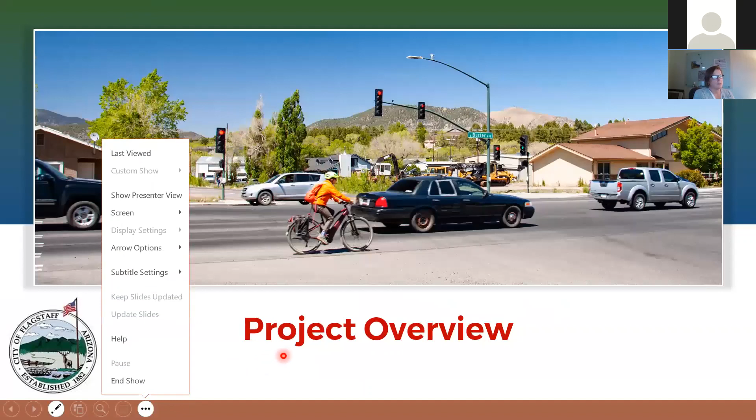In February of this year, council awarded a design build contract to a team that includes Ames, our contractor, and WSP, the design consultant. Since February, the team's been working on development of the approved concept, data collection for the traffic analysis, and coordinating work with BNSF Railway, the Army Corps, and ADOT.

We've also been working on property acquisitions and relocations. With early direction from council, we've also strongly focused on enhancing and building upon the concept for bike-pedestrian safety through separated facilities.

In addition to the overpass, the Lone Tree Corridor will also be enhanced down to Sawmill Road, and this is to provide a corridor with consistent improvements. The corridor funding was passed as part of Proposition 419, and that was in 2018 also.

So tonight we'll go over what we've developed to date for the project scope, the intersection designs of Lone Tree and Butler and Lone Tree and Route 66, and the project aesthetics.

Our next steps after tonight will be to take your input on the early design, and we'll also be presenting to council on October 19th, which is open to the public. We'll take that input and evaluate on how best to integrate your ideas into the project as we proceed with design. So this is the first of many meetings, and we'll be coming back as we make progress and to get further input.

One thing that you will not see yet in the presentation tonight is the economic impact analysis study. That report is in review in draft form with city staff and will be placed on our project site and presented at a future public meeting.

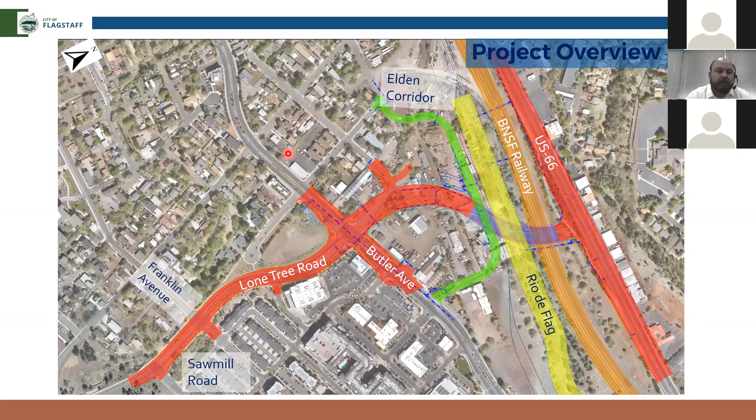So now we're going to go into a little more detail, segment by segment, to give a more detailed breakdown. This is the south segment, again north to south - south side is on your left, north is on your right. Our project limits begin at Sawmill Road and extend north along the existing Lone Tree Road up to Butler Avenue. There will be some intersection improvements, which we'll discuss later in this presentation.

What we are doing is widening. It's currently a 2-lane roadway, one lane in each direction. We'll be widening it to a 2-lane roadway in each direction, mainly with inside widening, meaning we'll reduce the median width to create an extra lane in each direction. We'll also have some outside improvements for the FUTS Trail at the top of the page, the west side of the roadway, and improvements for the existing sidewalk plus addition of a northbound bicycle lane on the east side of the project.

So on the bottom of the screen is a typical section. This is if you were standing looking south, so the east side, the bottom of your screen, is on your left; the west side, the top of your screen, is on your right. Walking through this: you have a 6-foot sidewalk, a 6-foot northbound bicycle lane - this moves the bicycle lane off the street into a buffered bicycle lane off the side of the roadway - 2 northbound lanes, and a maximum 15-foot median island.

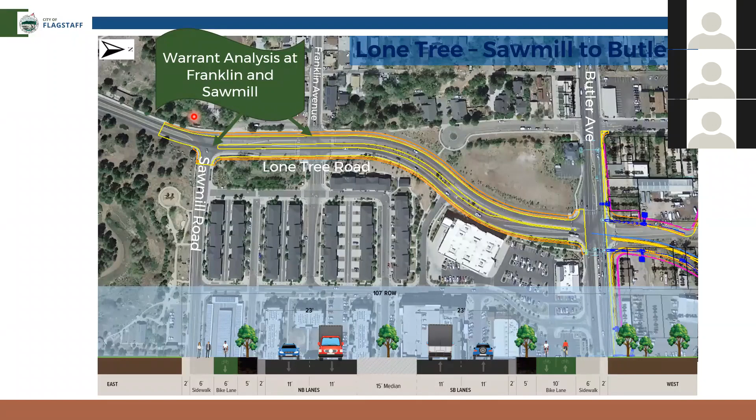Jason, do we want to hop back to that overview? Yeah, if we can go back.

Brannen will still have a connection to Lone Tree itself. You can see Brannen right here is connected. It will be cut off from northbound Lone Tree. There's a median that will come down, which we'll show in the next segment. But there will be a maintained connection to southbound Lone Tree. So the one direction that would be cut off is if you are going northbound Lone Tree, you would not have access to westbound Brannen. You would have to use alternate access going westbound on Butler, then coming up Elden, and then back through to Brannen. But there will be a right-in, right-out maintained at Brannen off Lone Tree, and the driveway accesses will be maintained.

Does that capture the area where your office is, for the citizen? Christine, I don't think it does. I believe that individual's office, and she'll correct me if I'm wrong, is out in the area where the green line connects towards Butler. So you'll have three ways to get into the neighborhood: one is on Lumber, one is on Gable, which will probably remain unimproved for the moment, and one will be on the Elden Corridor. It's hard to say specifically where you are and what access would be best for you, but we will not be cutting off access to any parcel.

This is the close-up of the next section, zooming in on the connections Christine was just talking about. To orient everybody, this is the new stretch of roadway we're building, extending Lone Tree Road to the north. Your north arrow is here on the top left. We're going to tie into US 66 on the north. This is a grade-separated roadway, so you can see the bridge structure begins right about where Elden Corridor is, and we'll elevate the roadway over the RDF and BNSF railways, tying into US 66 at grade.

We begin to climb grade-wise from Butler Avenue, where we tie into Brannen on the west, about 5 or 6 feet elevated at that point. By the time we hit Elden Corridor, we're at about a 20-foot elevation. Over the BNSF railway, we're about 24 to 25 feet elevated, to maintain required vertical clearances per BNSF standards. US 66 is at an elevated topography compared to Butler, and we're actually tying in at existing grade. We're also accommodating the existing FUTS trail system at US 66, with a split path: one at grade just south of the US 66 corridor, and another going underneath the bridge to provide a grade-separated pathway for pedestrians.

Elden Corridor coming off will provide some access to the east side parcels. We are also maintaining the Gable connection, as Christine mentioned before. So all these parcels are still accessible based on current existing driveways, and the west side parcels are still accessible off of Elden and off of Brannen as a right-in, right-out. The only change in access will be northbound to westbound coming off of Brannen.

I think there was a question coming up. Yes, we've had 2 questions. What will be the speed limit on the new roads? This relates to safety and noise.

That is a good question. I don't have that right now. I believe we had a 30-mile-per-hour design speed. Christine, do you remember offhand? Frank probably wasn't able to join us right away. I believe north of Butler on Lone Tree, the new extension overpass will be posted 30. South of Butler, I believe it will be posted 35. Jeff Bauman's on the call—I think that's right, but please correct me.

Yeah, I believe that was what I had in my memory too. Unfortunately, Frank couldn't join us right away due to another commitment. So, 30 north, 35 south, we believe, but we can confirm. Jeff in the comments does believe they're the same speed limits, so yes.

One other question: will there be a signal at the intersection of the Elden Corridor and Butler? Currently, the Elden Corridor and Butler are not planned to be signalized intersections, due to the proximity of the connections to Butler and Lone Tree. Typically, you don't want signalized intersections in such close proximity to each other. So right now, the plan is to have them as stop-controlled intersections. But the Elden Corridor in general is still being evaluated—we're still early in that evaluation process.

Annie Taylor, trying to go back and find your comments. Southwest of Lone Tree, before East Brandon. Go out at Gable. So I'm not familiar with exactly where that southwest of Lone Tree is. I think Annie's talking, Jason, about back where you've got the image with the green line. She wants to know if Gable has the median in front of it and she has to make a right turn. Will she have to make a right turn onto Butler and then U-turn somewhere? Or is she going to have the ability to make a left out of that area?

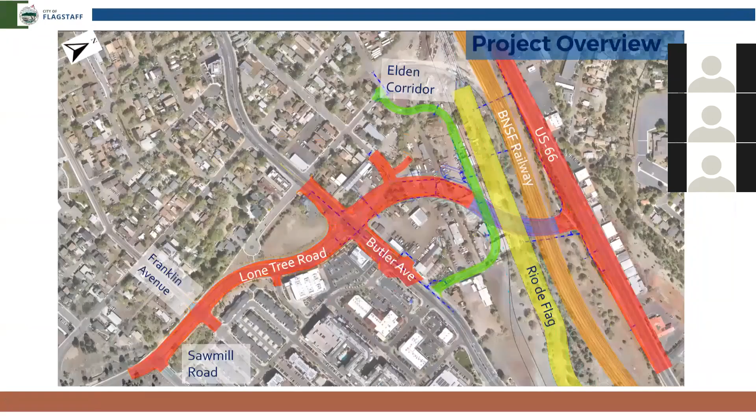Yeah, so on Butler itself, we're not changing any medians or any current movements on Butler itself. But you are losing the access at where Lone Tree itself is.

So you would have to back out to Elden, which does have a right out. Or you would have to go to the next street to the west, which I believe has a median opening. So that would be your impact—you'd have to go out Elden, right turn, and then come back around.

The other option would be to exit back onto Brennan, go out at Lone Tree Road, and then make the left turn at the signalized intersection, because you do have a right out on Brennan if you're on the west side of Lone Tree Road. So I hope I got that question now, understanding where you're at.

I think she has a follow-up. She's thinking her access would be at Gable, and how would she get into the Elden corridor from that location—I think she's on that little road, her property. Sorry, I know Annie from past public engagement, so thanks for coming tonight, Annie. But her building doesn't quite access at the green line—it's kind of between the green line and the red line. So she really wants to understand what spot she's in for circulation there.

So the access to the Elden Corridor will be at this point and at this point, so you'll have continuous access from both. Assuming you're coming from this corner, you get access to this road to make a right turn back to Lone Tree. If you're headed eastbound on Butler, your recommended route would most likely be a right onto Lone Tree, then out on the left to eastbound Butler, since at a signalized intersection you'll have a protected left to exit onto Butler. Elden would be a good option for a right turn onto Butler westbound and then back onto Lone Tree if you're trying to go northbound. But you do have access at this point.

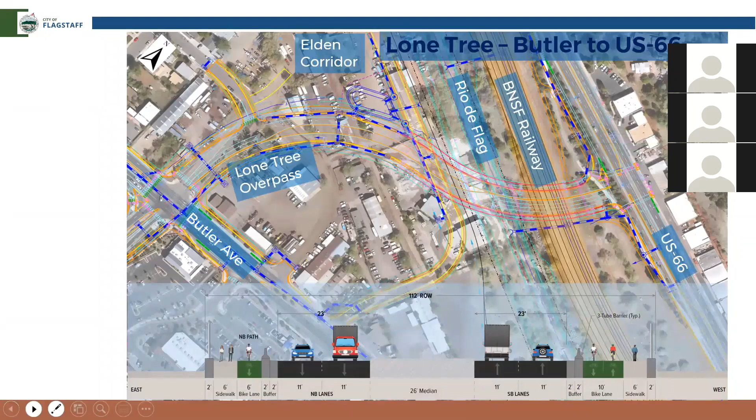So the next stretch is US 66. We're making improvements to US 66 starting on the west side, right around where Elden currently hits US 66, and then we'll have improvements not quite to Schweitzer Canyon. We're going to be ending improvements right around where the mortuary is, more or less, to give you the extent of our limits. A lot of it will depend on what we ultimately decide is the preferred intersection type, which will be part of our presentation later.

66 will be widened—our goal is to widen mainly to the south, which is what you're seeing in this picture. Lone Tree, like I said, will tie into the south at the rough limits we're showing here.

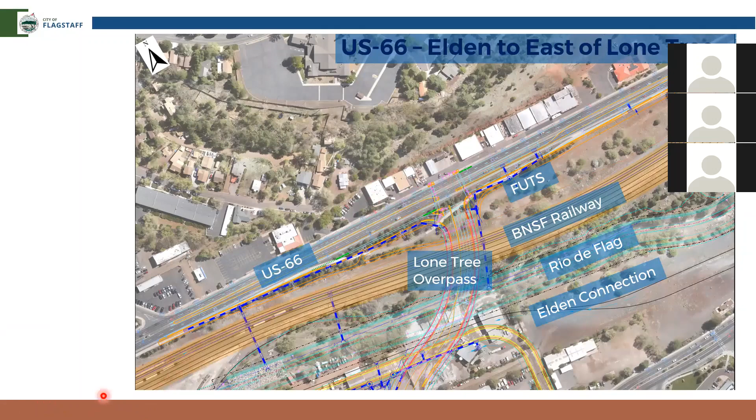Here's the typical section for the crossing: the north side is on your left and the south side is on your right. If you're facing east, we have a 4-foot shoulder that some people use as a bicycle lane. We have 2 westbound lanes, a median that will be partially taken up by left turn lanes where needed, and 2 eastbound lanes. We have a planned 5-foot bicycle lane going eastbound, and a right turn lane onto Lone Tree Road based on the volumes we're projecting there.

Off of Lone Tree Road, we would have the FUTS Trail connection. As mentioned before, we have two connections: one on the south side of the curb line as an at-grade intersection crossing, and a grade-separated crossing of FUTS going underneath the bridge to provide an uninterrupted crossing for people who don't want to cross at the intersections. We're providing an east-west connection to the north-south connection, and also a continuous east-west crossing for those just headed east-west who don't want to stop at the intersection.

Going a little step further—we are trying to maintain the north curb line, with most of our widening, or all of our widening, to the south if possible.

We are connecting the FUTS Trail east-west, and we are aware of the city's plan to have the Schweitzer Mesa connection on the north side. So we do have plans to accommodate that with our intersection design. We are aware of that project and are making accommodations with our intersection concepts.

Let me back up so we can address Kathleen's comment. There will be potential impacts to these businesses. This is an ADOT facility, so as we tie this intersection into the US 66 facility, ADOT does have requirements for access control. We are early in this project, so we're still having discussions about what those access limits will be and what the impacts to these properties are. We don't have those finalized at this time. We also know the Schweitzer Mesa connection likely will have some impacts in coordination with this project, so those are still being worked on. They're not fully evaluated yet, but we anticipate at least a couple of these parcels may be acquired as part of this project, and then parking for the remaining parcels, because they're losing driveway access, may have to be reconfigured onto the changed parcels. So we're working through those. I don't have a full answer, Kathleen, at this point, but it's something we are tackling during the next part of this project, during final design. Hope that answers your question.

We have another question from Beth Tucker: how will the overpass link to downtown affect traffic? Example, Santa Fe to Elden, then Birch.

We have run a travel demand model as part of this project, and as Christine mentioned, we have a traffic impact analysis. Generally this connection will become a heavily used network connection for vehicles from the south part of the community working north. We project with that travel demand model that, in general, the traffic volumes in the downtown area that are pass-through users, people just passing through on Milton, San Francisco, and Beaver, will go down. A lot of those vehicles will shift over to Lone Tree. Volumes going from Lone Tree eastbound on 66 will increase slightly, but vehicles going from Lone Tree west to downtown will decrease slightly on US 66. So generally downtown traffic - one of the goals that Blueprint 2040, the city's commission, and the traffic models are showing is that there should be an improvement in traffic volumes generally downtown, especially along Beaver and San Francisco streets. You're providing an additional grade-separated crossing with BNSF, eliminating delays. Users are going to want to use that, not get delayed at the traffic crossings. They're going to use this roadway to cross instead, and not use the downtown area as a pass through for this north-south connection. So generally there should be an improvement for the downtown area. Hopefully that answers your question.

Continuing on, BNSF Railway Realignment - this is one of our key stakeholders on the project. Current BNSF Railway is at a higher grade than Butler, not quite as high as the US 66 facilities, but to get this new roadway over their facilities, we do have to realign and lower their tracks through the project. They'll be a key stakeholder we'll be working with throughout the project life, through the design life and through construction.

In general, what our coordination so far has indicated, working closely with BNSF, is that we will have to shift their tracks to the south and lower them approximately 15 feet. One of our project goals and requirements from BNSF is that we'll have to maintain 3 tracks at all times. Currently there are 2 mainline tracks in service, and they have 4 siding tracks in the area. To service their current volume of trains, we'll have to maintain 3 tracks at all times throughout construction, while we're lowering the grade approximately 15 feet right at the bridge.

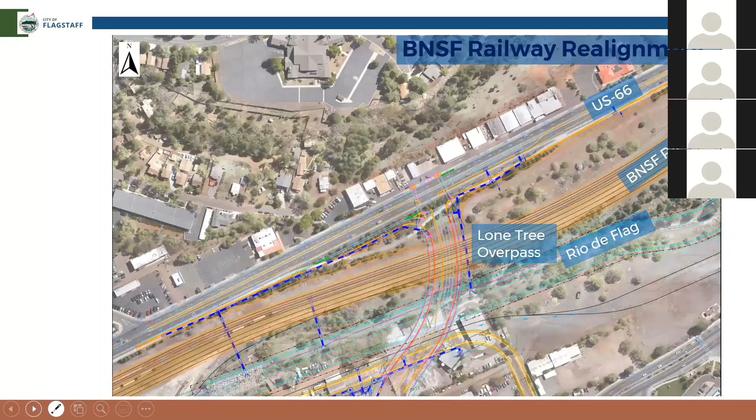We do have a... I can take that question, Jason.

So Charlie, about the Florence to Walnut bike ped underpass, that is actually to the west of Milton. That project is tied up together with the Rio de Flag, and it's part of an overall project called the Downtown Mile. What connects all of these is the relationship to the railroad and the impact to the railroad. We are working with BNSF to get both the Rio flood control, the Rio ped bike, and the Florence to Walnut ped bike pushed underneath the tracks in an area a little further to the west of the Lone Tree. So we won't be doing it at the same time, but we hope that Lone Tree helps us with some of the BNSF mitigation items that facilitate the construction of our other local projects.

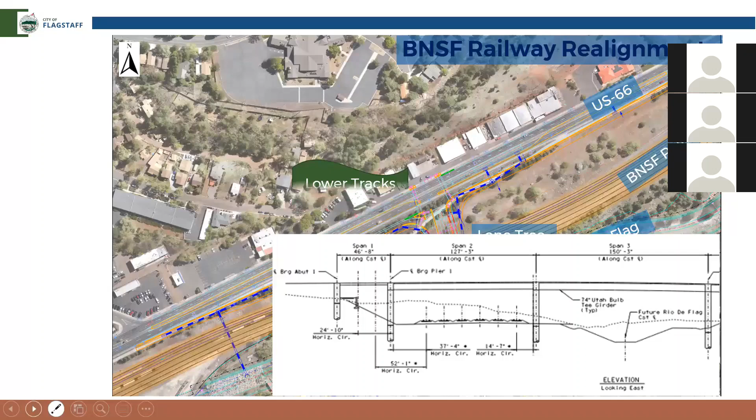Moving forward, at the end of the project, BNSF does have 6 tracks, and we will try to finish the project with 6 tracks per our discussions with BNSF. What we're going to show here is a visualization of the project, hopefully giving everyone a sense of the scale. Again, I want to re-emphasize that we are at schematic design. You're going to see some placeholder aesthetics; they're not intended to represent the final aesthetics of the project. We are not at final geometry or final design, so please be aware that what you're looking at is about a 25 to 30% design level. I will pause the graphics at certain points to highlight some items, but hopefully this gives everyone a sense of how everything's interacting together from a visual standpoint.

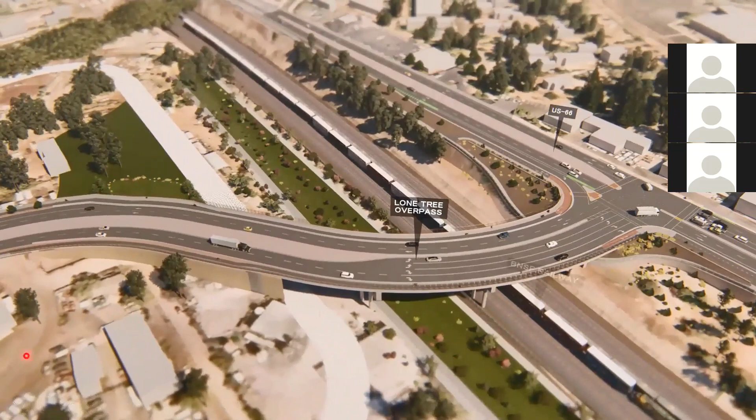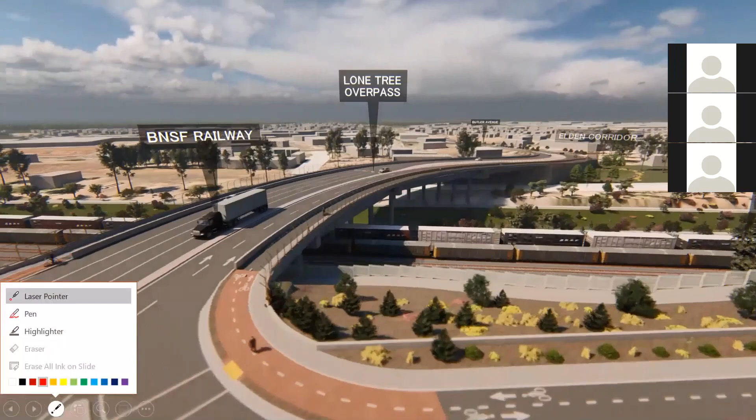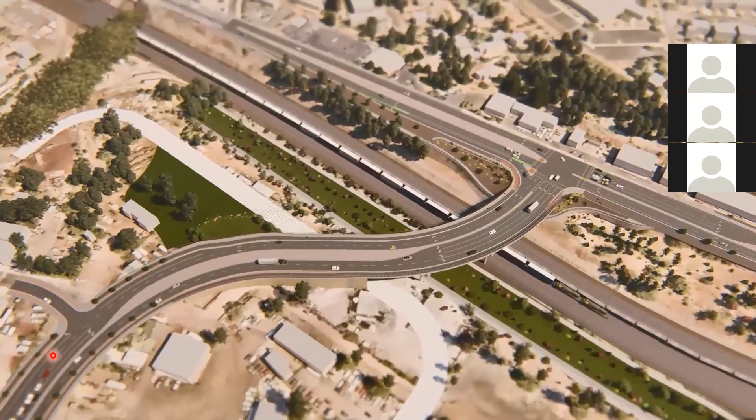There we go, we're going to play it. So this is a bird's eye visualization starting from the south and going north. You got the Lone Tree coming along the east side, BNSF Railway, and Rio de Flag as an open ditch coming through. I'm going to try to pause it here... oh, I'm not able to pause it, so we will restart that and I'll try to talk over it. Then we have some stills that we're able to share. Let me go back to... sorry. So again, we're starting from the south side, zooming into the north. We have a 4-lane roadway, and you can see an intersection at Lone Tree and US 66 to your right.

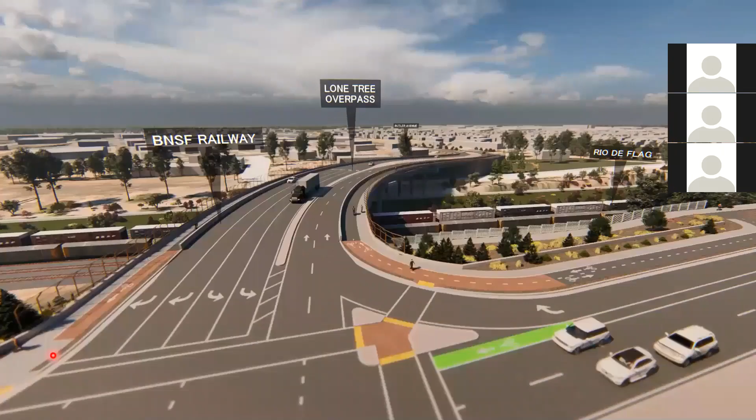Rio de Flag is an open ditch channel coming through the project. We've got our 6 lanes of tracks. You've got the FUTS Trail coming in underneath the bridge there, and you also see it coming along the south corridor, along the west side of the structure now. You can see we have a detention basin along that retaining wall on the Elden Corridor.

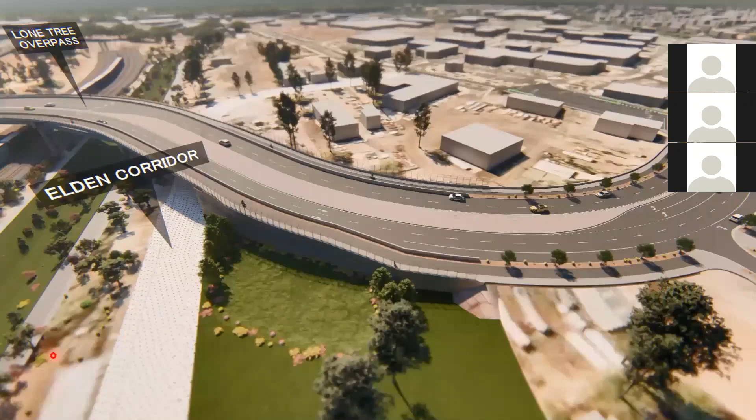We're still in the early phases of doing final design. It's going to be a mixed use multimodal facility and corridor. There's Brannen with that connection coming in. We have retaining walls supporting Lone Tree, and we're going to switch over to a fly through.

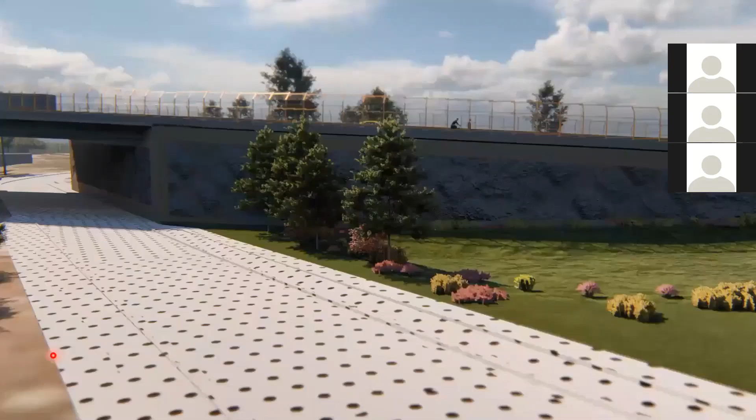This is going east to west of Rio de Flag. Then we're going to turn back around just to show the open space of the Elden Corridor underneath the bridge. And again, there's a detention basin, which we'll discuss a little bit later, adjacent to a retaining wall. Again, those aesthetics are just a placeholder, and that's sort of a visualization, just so you can see the structure.

Going into the stills, just to highlight some items. So we are proposing a 4-span bridge. We've got the first span over the Elden Corridor, and we've got the RDF open channel, and then we've got the 6 tracks of BNSF, and then we've got a span over the FUTS Trail on the north end, tying into the intersection of US 66.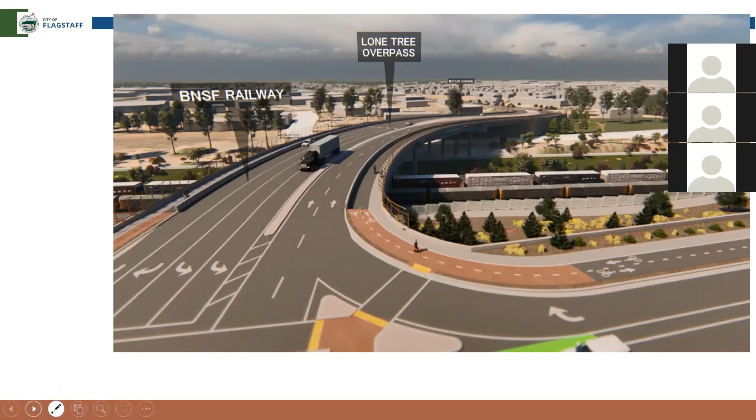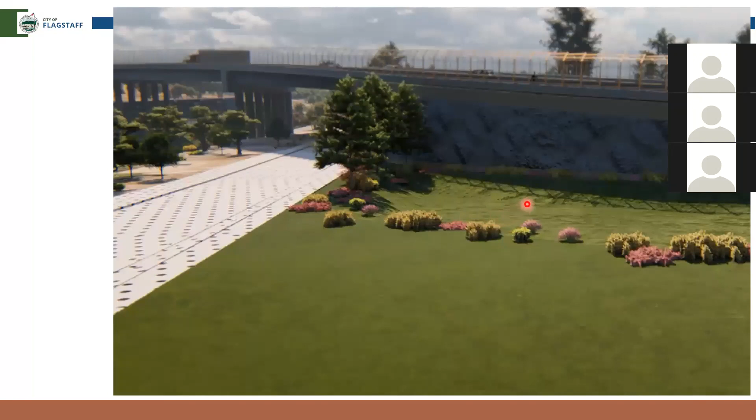And I see a question about the civic space. We will talk about that later on in the presentation. So I appreciate your question, Michelle. And thank you, Dina, for the separated bike lanes comment, we appreciate that input. And again, about the Eldon Corridor and the question about civic space, we'll talk about that later as mentioned.

But this is the detention basin. We'll also talk about potentially repurposing this for open space later on. But that's sort of just a visualization, hopefully it helps everybody picture a little bit better than the plan views of what's going on in this project.

So I think we addressed everybody's questions. We'd like to move into intersection design. We want to focus on the intersections of Lone Tree and Butler, and then Lone Tree and 66. The real keys we want to get into are the decisions our teams found during the schematic phase and made, and then some input we're seeking back as part of these projects.

So our approach to intersection design, just to cover real quickly: what we've done is we've collected data, we've coordinated with the regional transportation model and metro plan, we've coordinated with ADOT for the US 66 alternatives, and we've evaluated the data we've collected.

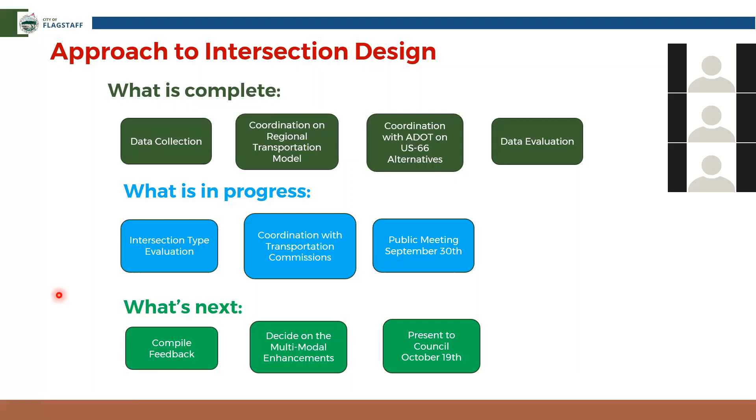What we're currently doing is we're evaluating the intersection types. We're coordinating with the city's commissions, the transportation commission, sustainability commission, or committees, and then we're having this public meeting here. What we're doing next is we're trying to compile the feedback and get a decision on the final intersection types with the multimodal enhancements, and I'll explain a little bit what that is. Then we're going to present to council on October 19th our recommendations for final intersection decision types.

So Lone Tree Road and Butler Avenue, we'll start there on the south end of the new corridor. We did look at several intersections and determined that for this location, there's really only one viable intersection option, and that's traditional. What you're seeing on the right here is an aerial view of a traditional intersection. You're not seeing the traffic signal poles here, so this is just sort of a really early schematic visualization to give you an idea of what it might look like.

We did look at other intersection types. We looked at roundabouts. We looked at a sort of divided highway type system where you would pass through the intersection and take a U-turn to get back, to increase efficiency by eliminating the left turns at the intersection itself. We evaluated 4 other intersection types, based on right-of-way efficiency and lowest impact to adjacent properties.

You can see we have the commercial center on the southeast corner. We do have Butler going east-west here, and Lone Tree going north-south in this picture. So you can see we have the commercial district on the southeast corner, we've got an existing building right on the northeast corner, we've got some properties on the northwest, and then we have a little bit of open space on the southwest corner. We also looked at the traffic volumes that were predicted by our models.

We also really focused on the multimodal impacts of this project. We have the FUTS Trail on the west side and really wanted to focus on how users get across this intersection.

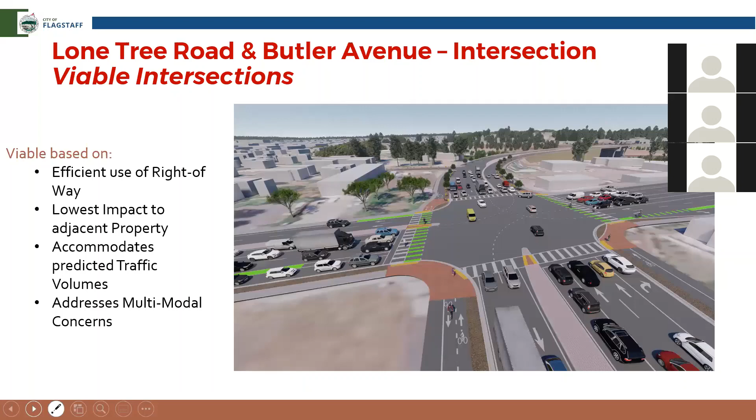The total number of lanes is still something we're discussing and evaluating, but current traffic volume numbers are really what's driving the intersection widths. Same with Lone Tree, the lane types and lane numbers are being driven by what the traffic models and travel demand models are showing us.

But going back to the multimodal impacts, and this is really one of the things we're looking for feedback on from everybody, there are national guidelines we want to bring into this intersection design. This is from the National Association of City Transportation Officials, NACTO. It's called Don't Give Up at the Intersection. These are national guidelines developed focusing on how we bring multimodal users back to our streets, back to our intersections. The big focus is how do we enhance a feeling of safety and bring actual safety for multimodal users at our streets and intersections.

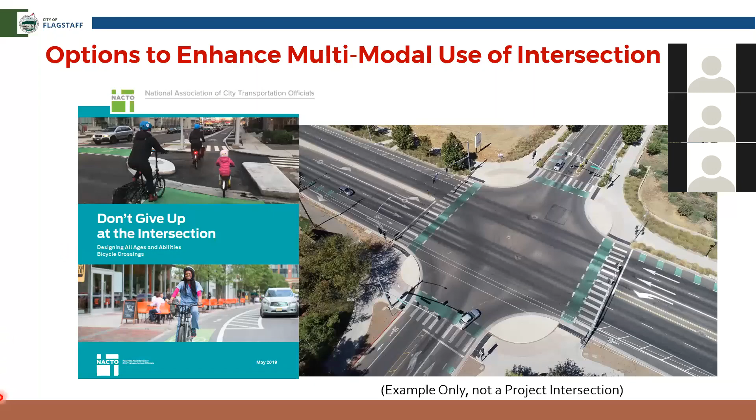So this has really been our guiding principle, and it's given us our toolbox for our intersections. What you're going to see in the next couple slides is the toolbox they provide and the recommendations they give. These are options we've considered bringing to our intersections and ideas we can bring in.

This is an example of using median islands and setbacks for vehicles. The basic concept is you set your stop bar quite a bit ways back from your median island. Someone did say they liked the one before the NACTO slide—I guess Sarah—but you set your stop bar back.

The whole goal of this concept is you get your pedestrians, using this yellow and white crosswalk, and your bicyclists using the green crosswalks—separating those two modes of pedestrian and bicycle usage. You get them in front of the cars, giving them a staging area where the cars can visually see who's about to cross the road, and giving clear sight distance to let them know who the potential users of the crosswalks are well ahead. Normally you'd have a stop bar right in front of the corner, so your car would normally in a traditional intersection be way up here, and you don't have as big of a staging area. This is becoming a more common approach where you have room for these setbacks.

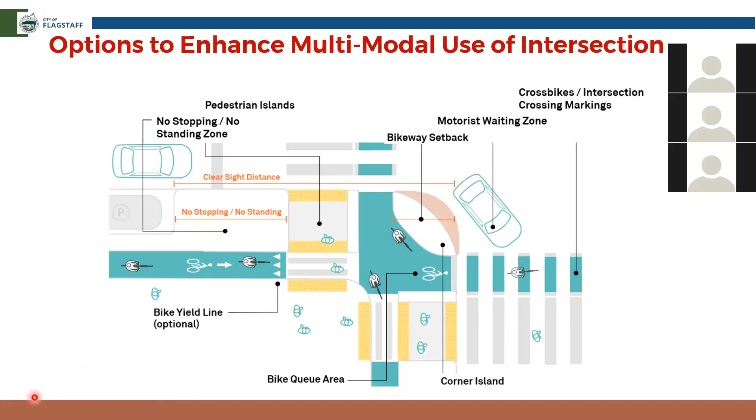So this is one consideration NACTO brings. Another concept they're bringing forward—all right, what's my mouse—

is use of high visibility crosswalks. Going back to the last picture, that's the green crosswalks and bike lanes—it's just a change in color, making it high visibility for users. For this example, it's being used for a bike lane. You can also see they're using it for a staging area instead of a raised curb and median island, and it can also be used for enhanced signing for bicyclists.

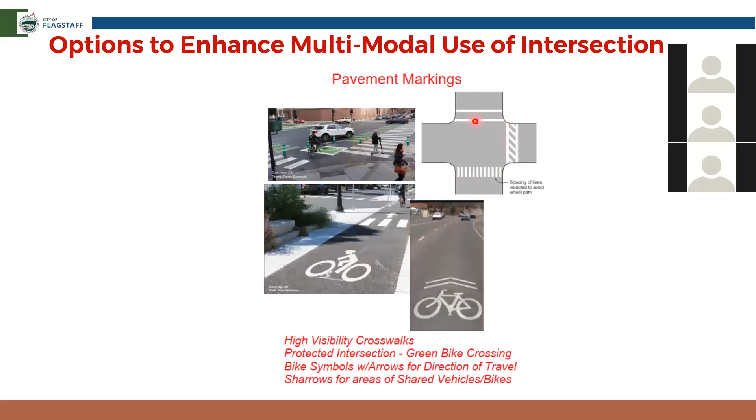So this would be a good use of enhanced signing for the northbound cycling lane we're talking about on the east side of Lone Tree, for example. You can also use thicker lines, different types of crosswalks, all to bring a higher visibility to the intersections. So that's another concept we can bring.

We can also use delayed signals for vehicles, where you have signals for pedestrians or bicyclists that let them enter the intersection ahead of the vehicles. So while the vehicles are still on red, the cyclists and pedestrians get a green 2 or 3 seconds ahead, and they're in the intersection ahead of the vehicles. You get a slight decrease in level of service for vehicles, but the pedestrians are out in front. Vehicles looking at oncoming traffic to their left can clearly see them as they start making their right turn movements.

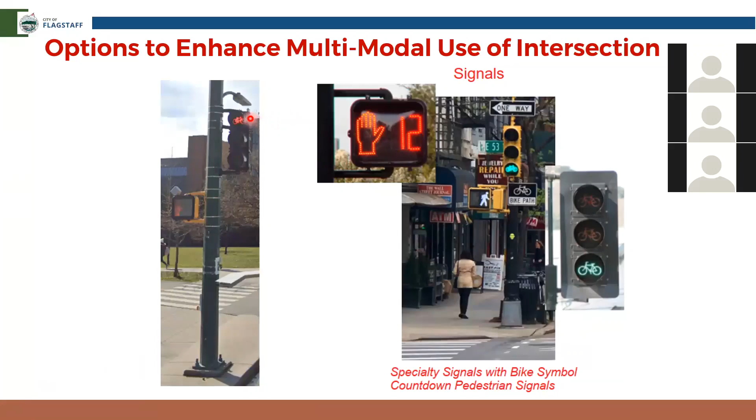An example of this on the next slide, showing the pictures. These are signal heads, you can see a little bike symbol in the signal heads. So it's just a signal timing you can bring into your intersection to try to increase multimodal safety.

You can also use island medians. We'll show a picture of this coming up, but the intent is, if you have a right turn lane, you can add a median island. This shortens the crossing for pedestrians and cyclists. You're crossing one lane, you have a refuge before you cross the through lanes to the median. So it just shortens your crossing timing or lets you stagger your crossing over multiple features.

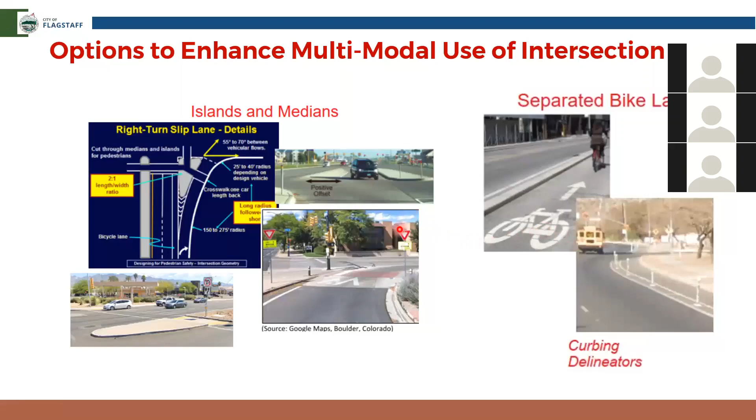You can also have separated bike lanes where you have a curb, or here a barricade of some sort, that separates the bicyclists from the travel lane, a deterrent from vehicles swerving into the bicycle lanes. The city is actually implementing something similar on Butler Avenue itself, so we're aware of that and looking into how we can integrate it into this project as well.

Another option for vehicles is offset lefts. Instead of your standard left where you're set far from oncoming traffic, you shift your left turn lane further to the left, so you get a better sight line and aren't blocked from the oncoming left. So instead of sitting on the right side of your median, you shift to the left side, getting better visibility of oncoming vehicles from the through lanes. This reduces conflicts from the left turn to oncoming vehicles just by improving visibility. It also provides a potential refuge for pedestrians, with shorter crossings and improved timing.

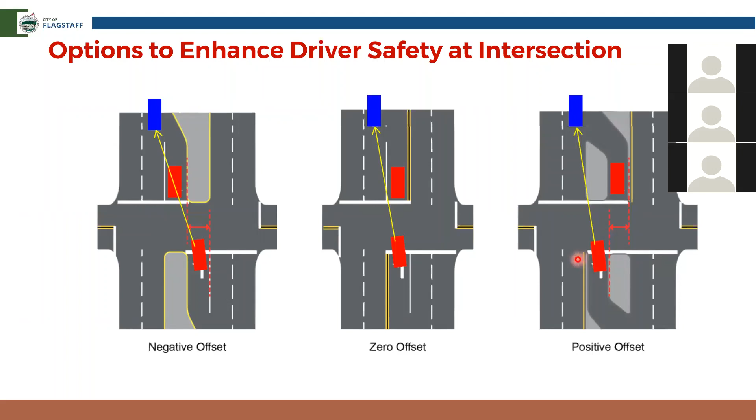So these are all concepts we brought to our intersection design, trying to figure out what's best for these intersections. Going back to Lone Tree Road and Butler Avenue, these concepts can be applied to both Butler and US 66. Keep that in mind as we go through this.

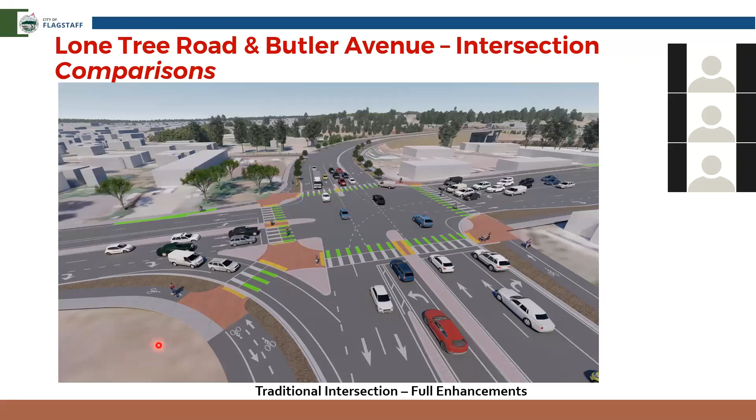Any other questions on Lone Tree Butler before I move on to 66? I don't see anything in the chat currently. I think you addressed why it's gotten wider, and there are some other questions the person on the phone may have at some point. We'll let you keep going so we can get to the final Q&A, and the person on the phone can go first.

Thank you, Sarah. Moving to Lone Tree and US 66. I want everyone to keep in mind the multimodal improvements can be applicable to all the intersections you're seeing as well for 66. I'm not going to go through everything again, so keep those in the back of your mind.

We did evaluate several intersections for 66 as well. There were a lot more viable intersection types here, based on the volumes and the geometry of a T intersection. We did have two non-viable intersections to show some of the things we considered.

One is a jug handle, shown on the left side here. This concept has a left turn exit to the right that becomes a through movement instead of a left turn movement—a concept used on the East Coast. Operationally, this works pretty well because you eliminate a left turn movement in the signal phase.

However, there's a large footprint required, taking out a lot of businesses. It's also a new intersection type that doesn't meet driver expectations, and there's a lot of tourism. This was considered non-viable since it'd be the only intersection of this type in Flagstaff, with a pretty large learning curve, especially for weekend visitors or non-residents in the area.

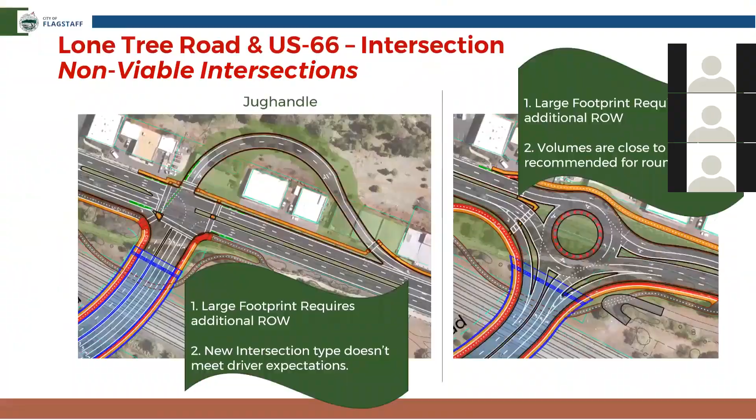So going back to questions real quick. First, this is Sarah - I'm going to help you with the question so you don't have to keep flipping back and forth. I think the first question about this intersection was, are there bus stops at this intersection or nearby? Because folks don't see pullouts in the illustration, and maybe Jeff or Christine might have to jump in and answer too.

Yeah, so we have talked to Mountain Line, and there currently aren't any identified bus stops that we've been made aware of on this corridor. We will continue to revisit them throughout design, but currently I don't believe there are any planned bus routes that would use this corridor, is my understanding. Jeff and Christine, I don't know if you guys have heard anything more since we last visited with Mountain Line.

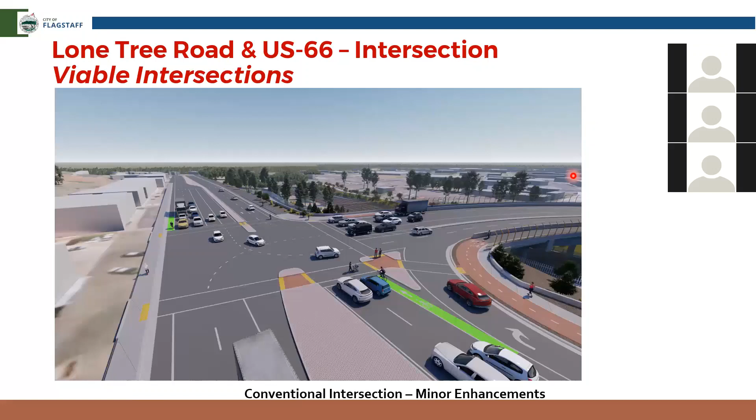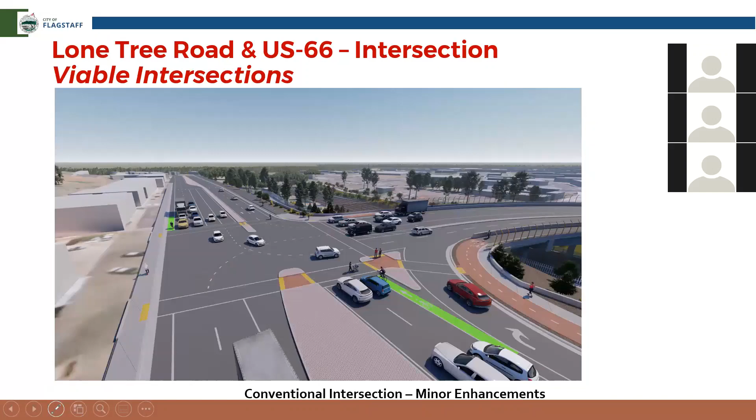I think we caught all the questions. You're caught up right now. I'm sure they'll come in until we get to where we're starting to unmute.

All right, I'll turn it back real quick to Christine to give an intro to aesthetics.

Great, thanks Jason. So for the aesthetic conversation, we first needed to work with BNSF and the Army Corps on how the bridge needs to span the corridor, and what that means for foundation and bridge type requirements. Tonight we'll be taking input on enhancements that can be added to our initial design to make it visually appealing and to tie it to the Flagstaff and Southside community.

Aside from the bridge, another opportunity for project aesthetics will be corridor landscaping. The Southside plan also includes civic space that will be added to the area in the future as those projects are funded and programmed. We've taken the approach on the Lone Tree project to see how we can design our project to make the integration of the future civic space around the bridge easier.

Budget may be a constraint depending on what ideas we hear. But ideas from today that may not be feasible can be carried forward and placed in the Southside community plan if that's what the group wants.

So for the bridge aesthetics, we wanted to get you thinking about what types of elements you would like to see, what subject matter you would want depicted, and what you don't want to see.

All right, so I'm just going to be highlighting some areas of the project where we can incorporate aesthetic designs, and just to reiterate what Christine said, whatever you see here are just placeholders. We're not intending to show anything we've committed to for design, it's just intended to show where we can incorporate design elements.

I think the biggest area where we can incorporate aesthetics is what we call rustication, which is when we incorporate stuff into concrete or bridge elements. So you'll hear that term from me when I say rustication. It's in the bridge abutments and retaining walls. That's what you're seeing here, the sort of stone texture pattern.

These are elements that can be 2-3 inches deep or extruded from the concrete, and they can be artwork, patterns, repeatable patterns, or panels. It's really open, we can be flexible, and we're going to bring up some examples of what some of those things can look like. So we can get creative, we can get standardized.

We have landscape areas under the bridge. We've got some picket fences coming in. This is a fence that's separating users from BNSF Railway.

We do have some limitations when we're dealing with some stakeholders like BNSF, but we do have some flexibility where we can get some creative ideas in.

We've got fencing along the bridge, and you'll see some pictures of elements and artwork we've done on other projects. We've got barriers where we can incorporate some rustication along the bridge. These are all palettes, or rusticatable areas, that we can use to incorporate artwork and beautification into the project.

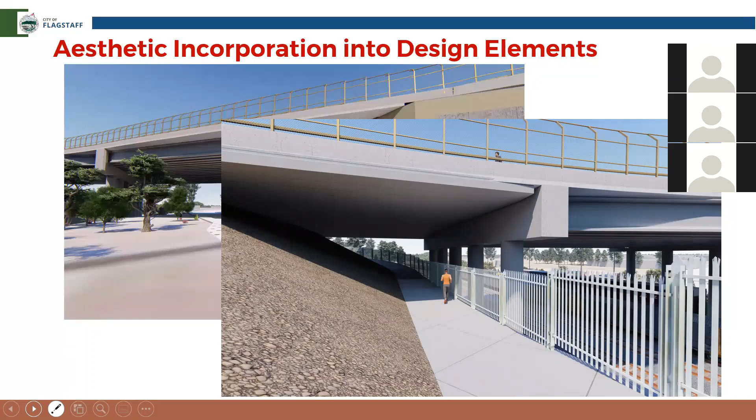So those are the areas we really want everyone to start focusing on, and think about what we want this project to look like when we're all said and done.

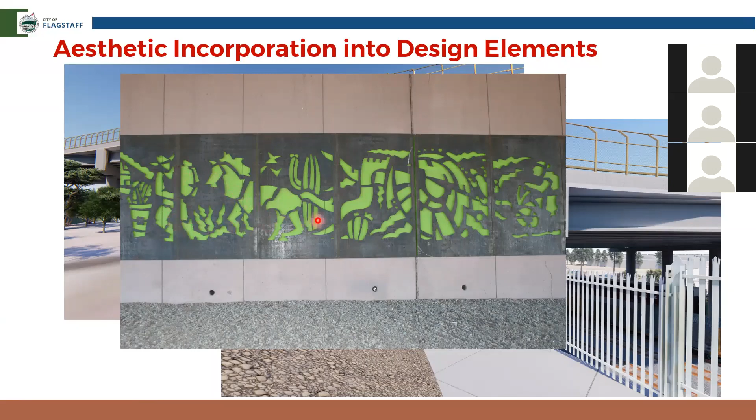This is an example of rustication on a retaining wall. These are panels, I believe cut steel, that were put on the structure later. You can do this approach, or you can do something cast into the concrete - we'll see an example of that shortly. This was an artwork piece over multiple panels, so that's one approach we can use.

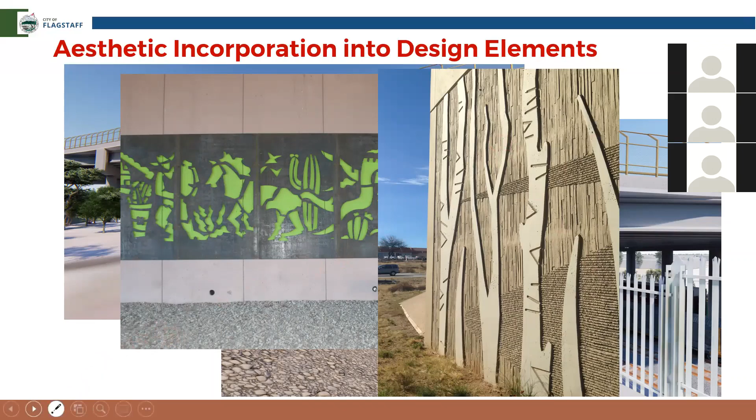Next example, this is a rustication that was cast into the concrete, not a repeated pattern, but it has variable depth to give the structure some depth, like a little bit of a wood pattern. So we can get creative like this and do some really cool things now with different forms.

We have some landscapable areas along the walkways on the bridge itself we can incorporate. We've got the user side of the fence and some barricades. We can put some monuments or gateway features as you're walking onto the bridge.

Do we want a monument or a historical marker or some other feature that tells a story about the community or the history of the community? Those are things we can try to incorporate into the project.

Christine mentioned that there are other aesthetic elements through the corridor, and if we want to bring those patterns into this project, we can, or we can incorporate new concepts.

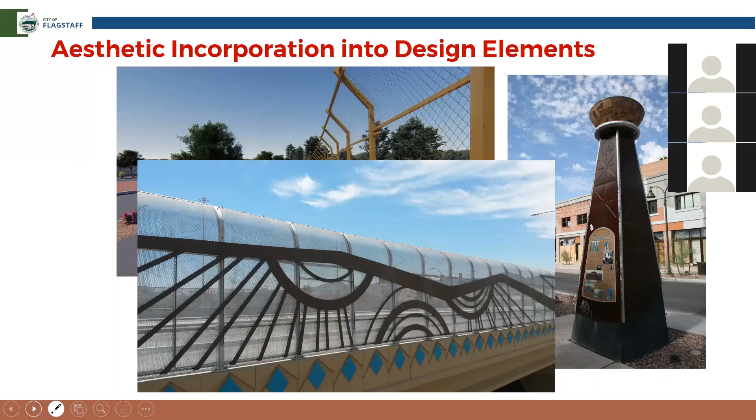We do have a Wheat Design Group who have worked on transportation projects all over the state with multiple communities, and done a lot of creative stuff, working with individual groups, artists, and transportation owners to really bring ideas and find practical solutions for concepts like these in transportation projects.

This was actually one of their designs down in Tucson, where they put a pocket park into a new pedestrian underpass, under a UPRR tunnel bridge, to provide a gathering area for their community. They incorporated some local artist work with pedestals, a seating area, and some landscaping.

Again, a little gateway feature to that bridge and a gathering area for the community.

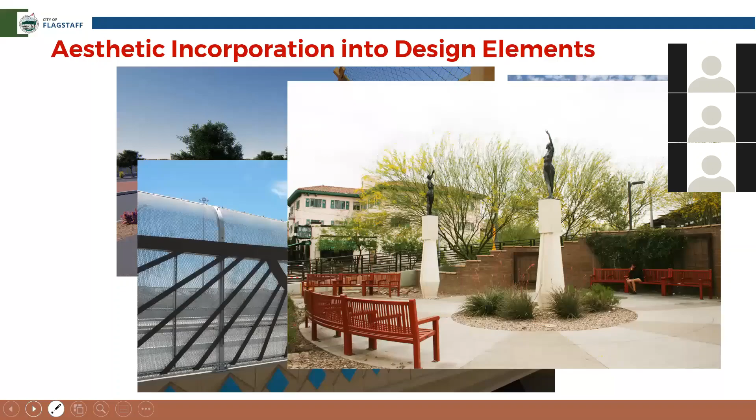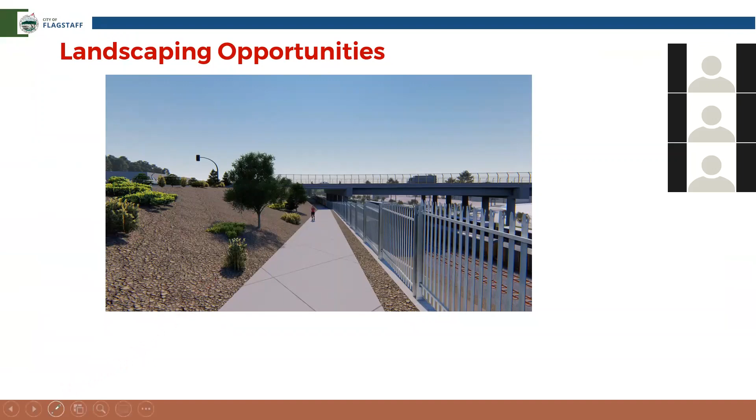Again, we have a lot of landscapable area, especially between 66 and the Foothills Trail. It gets less as you go further south, but we'll try to highlight some areas as we go forward through these slides. So this is the south end of the project.

We have that detention basin I mentioned earlier. Our goal with this detention basin is to make an area that's landscapable and usable for the community. We can adjust the size, depth, and slopes. Our goal is really to make this a usable area, a place where kids can go out and throw a ball, or families can go have a picnic out there.

This is something the city of Tucson has done - they've turned some detention basins into soccer fields at some of their parks. So we want to try to capture, if we have to have engineering features in these spaces, we want to make them usable for the community at the end of the day. These are things we look forward to working with everybody on.

Outside these limits, we may have some areas that we're just accommodating future work by others, but where we have elements, we want to try to incorporate what we can.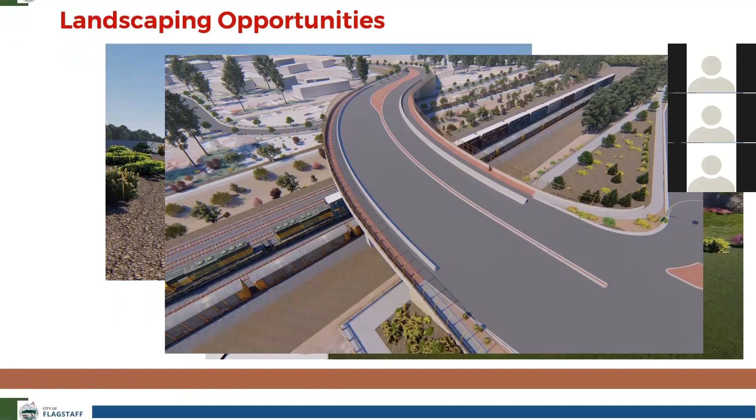As Christine mentioned, we are trying to make this project accommodative of the elements from the Southside neighborhood plan. We are providing this extra span and trying to create as much space vertically and horizontally as possible in this section of the corridor. We also are providing retaining walls along both sides of Lone Tree to try to capture as much usable space for the community as we can provide.

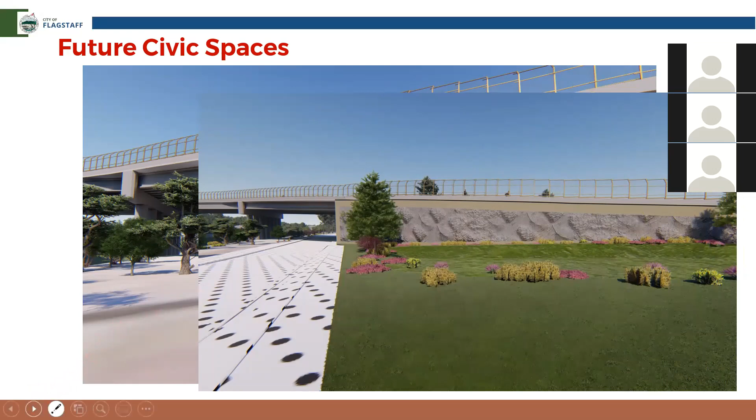You can see the retaining wall here, and as I mentioned, the detention basin, we want to make this capturable and usable by the community. We're really trying to capture as much space as we can so we can incorporate it into the future plans, as part of that Southside neighborhood plan. If we can find spots where we can have gathering spaces or little pocket parks, we're keeping an eye out for those areas. And if it's possible to provide or incorporate that space, we're working to at least identify those and then work to where we can.

Bringing up the Southside neighborhood plan, this is something we look at, and Wheat Design Group and our design team are aware of, and we're working with, incorporating where we can. We're aware of their plans for future civic spaces. We've eliminated these fill slopes that were shown in scenario 1 to create as much open space as possible on each side of the bridge.

We're also aware of scenario 2, and the potential reuse of the area underneath the bridge. That's why we've provided as much horizontal and vertical space as practical with the bridge design. We have about 17 or 18 feet of vertical space under the bridge, and a span of about 130 feet horizontally. Currently we are showing Elden Corridor taking up part of that space, but we do have usable space outside of that. So we're aware of all these elements and what the community has shown in their desire in this plan, and we're trying to incorporate elements where we can and provide it for the community.

Jason, there were two questions.

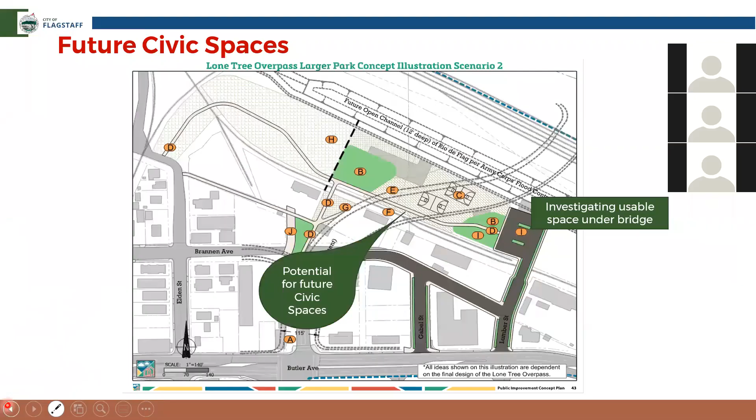Yep, about the aesthetics. The first one is a question about lighting, because we're clearly showing these illustrations as daytime, and I think this was a common theme in the South Side, that people were worried what the security would look like in an underpass area that's near the neighborhood. So what could you say about lighting options being considered for the aesthetics, that are being looked at but really haven't been programmed yet, but we're just trying to make sure they're part of our thinking early on?

Yeah, so lighting will take two forms on this project. You're going to have underdeck lighting, which will be in this area. Wherever we have pedestrian areas, safety is a definite feature. The other area would be the FUTS Trail on the north side. That's all part of final design, we have not incorporated any of that into our schematic design, but you would anticipate having lights along this wall and likely along this pier. We have light designers that would make sure the lumens and light analysis have sufficient coverage of this area to make everyone feel safe.

You also have lighting that would be up top for the users atop the roadway. We would anticipate having potentially light poles and pedestrian lighting along the pedestrian walkways. We're aware of the city's Dark Skies initiative, and we have the same thing down here in Pima County, where we've done several lighting projects, so we're aware of those requirements, and our lighting designers will incorporate that into their designs. So that's something we'll work through during final design. I don't have a schematic level concept design for it yet, but it's something we're aware of and will work through and incorporate into the project.

So moving past aesthetics, just want to give everyone our next steps. I'm sorry, if—oh, pause real quick.

I think Michelle James had a question regarding the civic spaces. Michelle, did you get the answer in the presentation, or do you have a follow-up question? Okay, thank you. Go ahead, Jason.

All right, thank you. So next steps, just to let everyone get an idea of where we are at. We talked a little bit about schedule. So we are finishing up schematic design in the next month or so, pre-design here on the schedule. What our goals were at schematic were to confirm the project assessment, which was done in 2010 and updated in 2020.

We restarted coordination with stakeholders. As I mentioned, we have a lot of stakeholders: ADOT, Army Corps of Engineers, and BNSF, all as major stakeholders. We also have the commissions, the public, you guys, mayor and council.

We started doing preliminary decision making, refining the geometry of the roadway, doing some preliminary structure design and structure type, doing roadway design, getting the TIA, the traffic impact analysis, the environmental impact studies and reports done, and then having this public meeting. So those are all the schematic goals, and we're getting towards the end of that phase.

We should be wrapped up by the end of next month, and then we're going to be heading into final design. We're working towards that final design, and we'll have continued coordination with all of our stakeholders, the public, the commissions, mayor and council. We will have ongoing public meetings during this project, so please keep an eye out for additional public meetings as we go forward. We want continued public feedback and incorporation of ideas and comments.

She's asked if she's understanding correctly, the Elden Corridor incorporates separated bike lanes and ped crossings of Butler to Lone Tree to downtown to allow a crossing alternative and avoid crossing the intersection. So, I'm not sure I understand what the Elden Corridor is when you see it on these drawings — it looks very vague right now, like the polka dots in the slides we just passed.

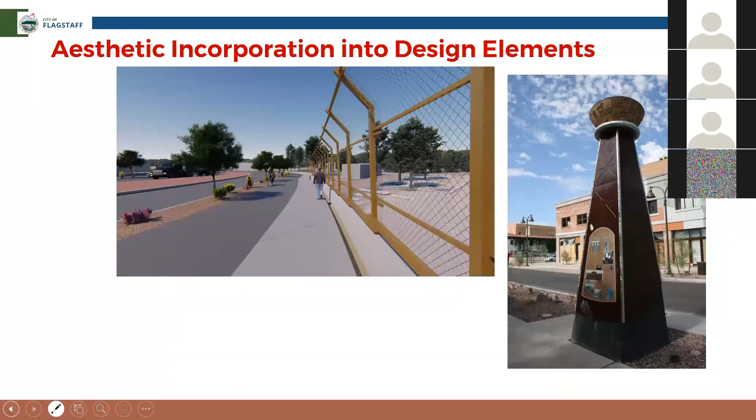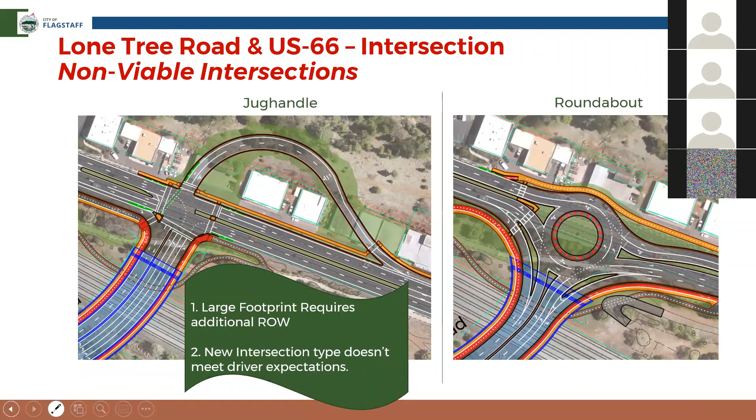And that's because there's not a design for it yet. What we've heard from some people is that the vehicle access there is very important. And what we've heard from other folks is that the bike and ped access should be paramount, and that maybe there should be no vehicles or very limited vehicle access. So those are two things we've heard from different groups that are in a trade-off.

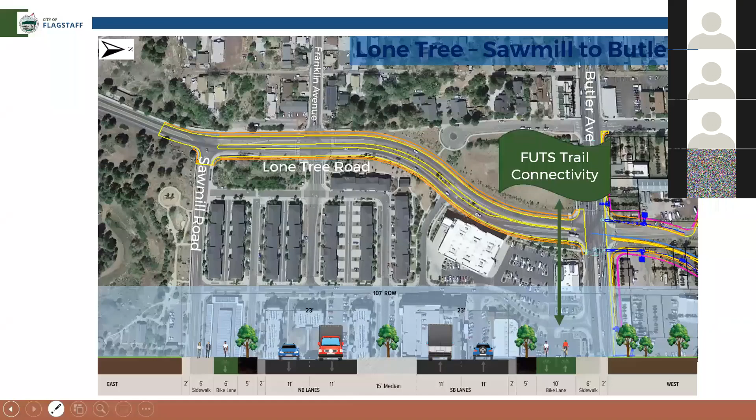So there's actually, if you go to the survey, a specific question where we ask for your feedback on the Elden Corridor and what it should accomplish. The reason you're not getting clarity from this presentation on the Elden Corridor is we don't have clarity on it yet. We know that this is something that was part of the design work, and we're asking for your feedback on it, and that's why the survey is so important. I know we didn't put up what the questions are here, but we do have some really tailored questions for the things the project team is still working towards more clarity and design on.

And then Kaysen had a comment in the chat, but I don't see a question. Lisa will be saving the chat from today, so if you do have a comment you just want to put in the chat, we'll get a copy of that. It won't be lost at the end of the meeting.

Are there any other questions? I think we've answered all the ones I've seen. I know Christine and Jeff have also been scouring to make sure I'm not missing any. I think we're good, but please, again, I can't say it enough — everybody reach out directly to me, and we can set up time to go over the plans. I'll come out to your properties, whatever helps with your understanding of the project.